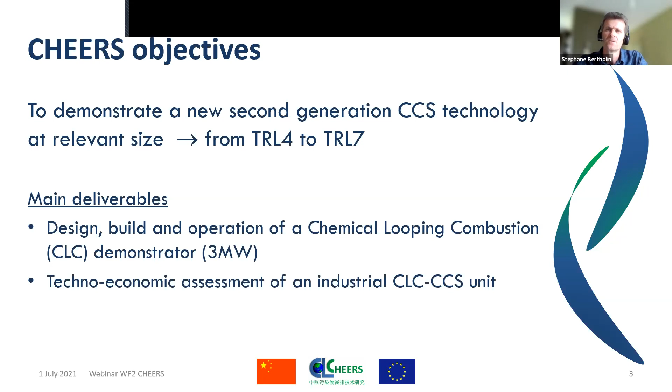So to achieve these goals, the project is organized in several work packages. The first one, work package 1, led by SINTEF, is for the coordination of the project. And then you have work package 2 for design studies, work package 3 about development of the oxygen carrier. In fact, it's the selection of the oxygen carrier for the demonstration unit.

Work package 4 is for the process integration. So basically, it corresponds to the FEED for the demonstration unit. Work package 5 is about the assessment at the industrial scale. And the most important, work package 6, led by Tsinghua, is about the construction and operation of the demonstration unit in China. And finally, work package 7, led by Bellona, is about the communication and dissemination for the project.

So today, we'll just focus on work package 2, the design studies. So just to conclude this brief introduction and provide some information before the presentation of my colleague, I would like to highlight what was the biggest challenge for this work package. So as I said, CHEERS is a Chinese European project with a common objective, which is a demonstration of the CLC technology, but considering different purposes.

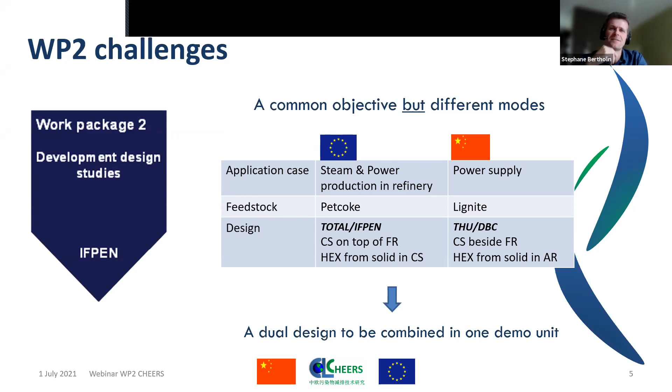And at the end, I will come back to present a brief overview of the main results of the pre-FEED study, which was the final deliverable of this work package, and the main input for work package 4, which was the FEED of the demonstration unit. And at the end, we should have time to provide some conclusions, the current status of the project, and answer your questions. So now I will give the floor to my colleague Sina, who will present the European design.

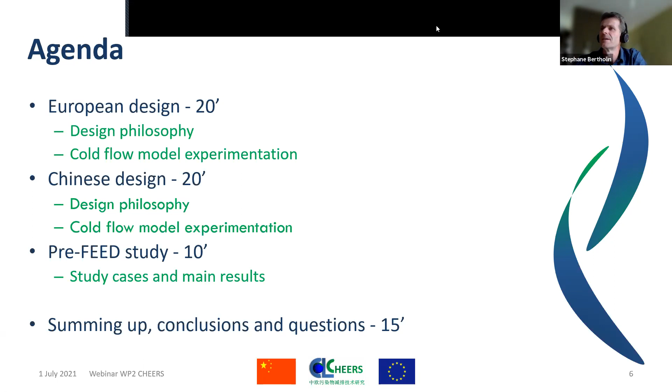Thank you very much. So just, okay. Oops. Should be fine right now, right? Yes, it's fine. Okay.

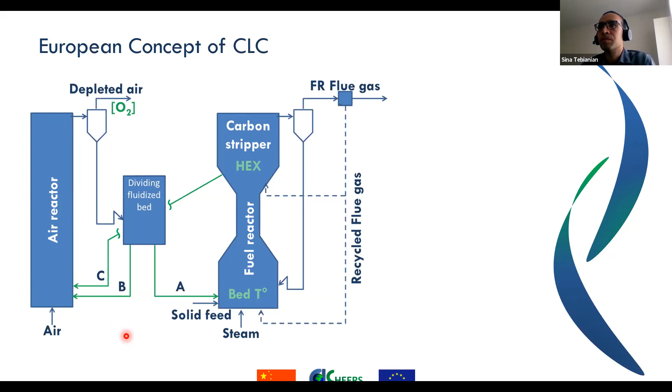The solid circulation actually is a very crucial parameter in the unit, because it's not only the solid circulation, but also it can define the operating conditions of the unit. For example, if we talk about the L valve A, of course, it controls the oxygen carrier flow rate to the fuel reactor, but the solid flux is also the amount of heat that we are bringing from the air reactor to the fuel reactor for the combustion reaction. Therefore, we can use it also for controlling the fuel reactor bed temperature for the desired value that we have.

The other one, the L valve B, is used for oxygen carrier recycling around the air reactor, and that's actually used if we are not satisfied with the degree of oxidation of the oxygen carrier in one pass, and we want to control the concentration of the oxygen in the depleted air. Therefore, we can actually recycle a part of the oxygen carrier back to the air reactor in order to achieve the concentration of oxygen that we need in the depleted air.

The last L valve, which is connected here with the letter C, is of course for controlling the solid flux back from the carbon stripper to the air reactor, but also can be used in order to control the level of fluidized bed in the carbon stripper. As Stephane was saying, our carbon stripper has an integrated heat exchanger, and the level of the fluidized bed in the carbon stripper actually can define the amount of heat that we are going to extract. And therefore, with L valve C, we can actually do this control.

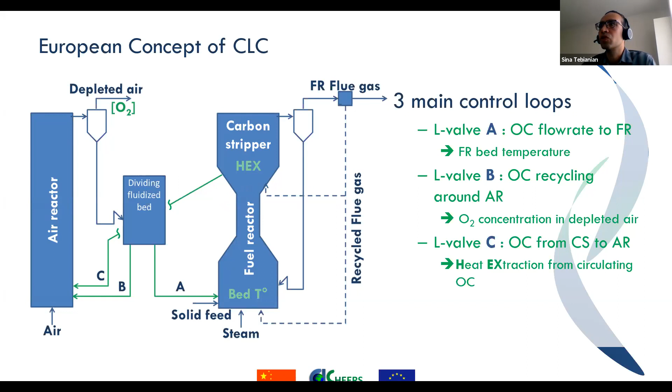Between 2017 and 2022, which is actually the project CHEERS, it was mainly on the industrial demonstration of the technology. Therefore we are designing and now going to the construction of a 3 megawatt industrial demo unit that can be operated in autothermal operation, but also integrates some other important parts of a CLC, which are integrated heat exchange and flue gas treatment, for example, based on DeSOx and DeNOx.

Between 2022 and 2027, the commercialization of the technology once we demonstrated it on the industrial demo, and that one is the demonstration of the process in a 50 megawatt scale unit, and also integration of the carbon capture and storage chain in a refinery or petrochemical industry. So that's the European roadmap for CLC development.

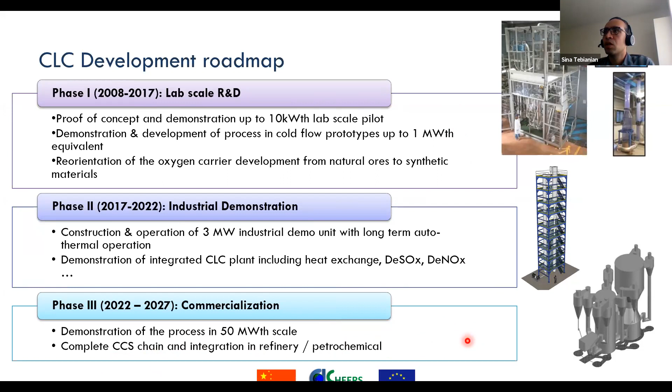In more detail, our activity was to obtain a robust design of different sections through research and development. So the main sections that I mentioned before are shown in this scheme here. The air reactor, that in our technology is mainly a riser. For that one, we studied its hydrodynamics through this cold flow mock-up with an 18-meter riser. We also studied the solid circulation that is controlled with L valves, and those were studied at different scale prototypes up to a scale of 1 megawatt.

We studied also the carbon stripper with a compact and fast separator at two different scales. The concept was validated at a 10 kilowatt cold prototype, but then was studied also in a 1 megawatt cold prototype in order to obtain a robust design.

The fuel reactor, as you can see here, has two different sections. The bottom section is mainly for giving the residence time necessary for the gasification of the solid fuel. And once we have the gasification, we have this other section, which is a dilute transport section. So it's mainly in pneumatic transport, for combustion termination of the gases produced in the gasification. And that one we also studied in different scale cold flow mock-ups.

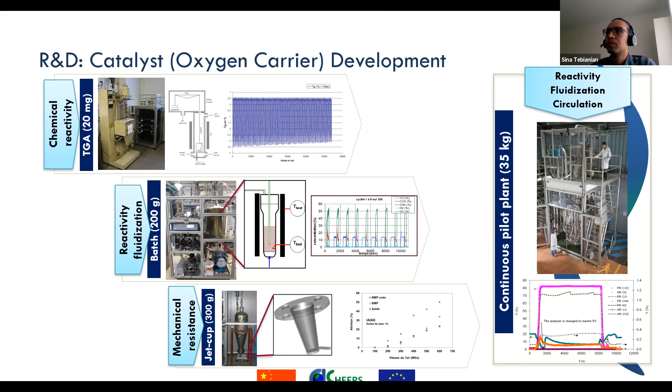So as Stefan was saying, as part of the CHEERS project, we have also produced a prototype of our design. The main reason behind the construction of this cold flow model was that the reliable design and operation of chemical looping combustion depends on some parameters such as stable and controlled solid circulation, hydrodynamic stability in the fuel reactor and the air reactor, and the adaptability of the heat exchange to the thermal power. So if we want to increase the thermal power, we have to increase also the capacity of the heat exchanger, and also the efficiency of oxygen carrier and solid fuel in the carbon stripper.

We have decided to build an equivalent 1.5 megawatt cold flow model that this time actually integrates all the sections of our design together in one unique cold flow model. What we have done until now was to study and characterize individually each section of the design. This time we are integrating all together in order also to show that the design is stable and robust, and the operation is stable and can be operated for long hours.

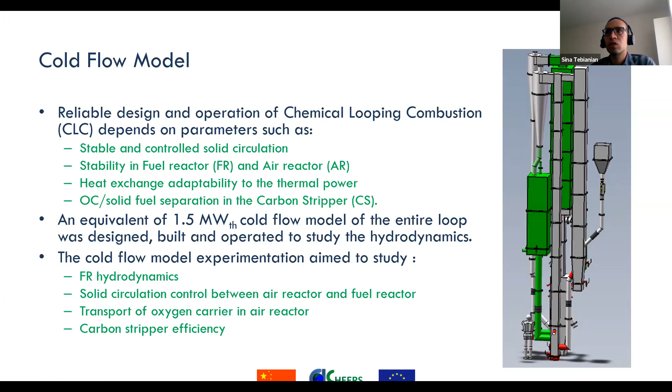And we did some experimentation in order to characterize the fuel reactor hydrodynamics, to show the solid circulation control between the air reactor and the fuel reactor in continuous operation, to study also the transport of oxygen carrier in the air reactor, and also to show the carbon stripper efficiency. And I will show some of the results in this presentation.

Okay, so here I'm just showing the time frame that involved the construction. This was a collaboration, of course, between Tsinghua, IFPEN, Total Energies, and Dongfang Boiler. So we were all part of this design. We had the meeting in Lyon in 2018, and then we did some detailed design. We did the construction, the commissioning, different rounds of experiments in order to optimize the system of measurements and also the design. And finally, at the end of 2019, we did a successful round of experiments for obtaining different experimental data. You can see a picture of the unit here.

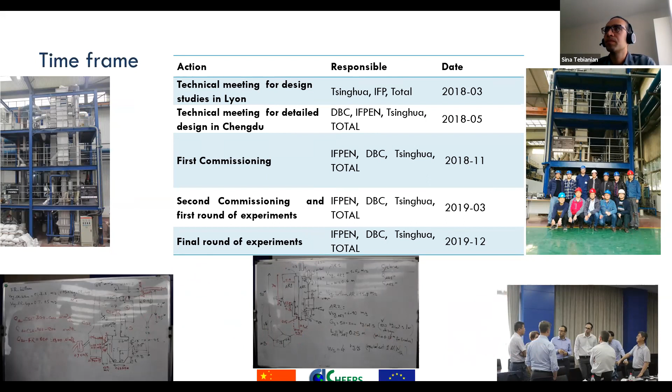These are just some of the notes that we were taking during the meetings with our other partners. And here is just a picture of the group that we were working with during the commissioning.

Okay, so the geometry, as I said, is really very close to the demo unit that we are doing in terms of the characteristics. We have an air reactor, a 10 meters high riser with a square section of 0.25. Then the solid flows to the dividing fluidized bed, different L valves, one for recycling back to the air reactor, and the other one to be sent to the fuel reactor. Different sizes were also used in order to see the effect of the size of the L valve.

The FR dense section that is used mainly for the gasification was 2.5 meters high, with a cross section of 0.6 by 0.6. Then this one was connected through a riser to the carbon stripper that was 3.9 meters high, and we equipped the whole unit with pressure taps and also the possibility to do some dipleg filling for characterizing the hydrodynamics and the solid circulation.

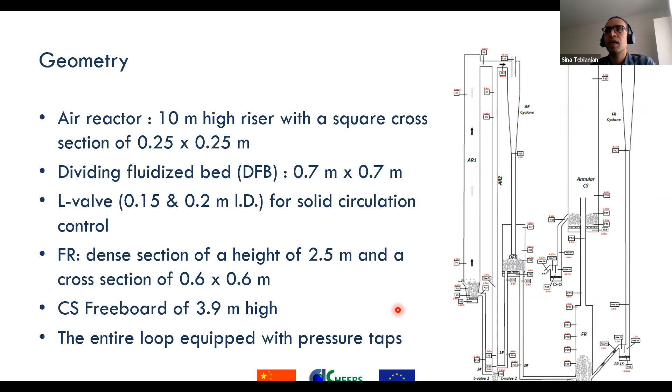So in this slide, I'm going to show you the visual behavior of the cold flow model, and you can also find this video on our CHEERS YouTube channel.

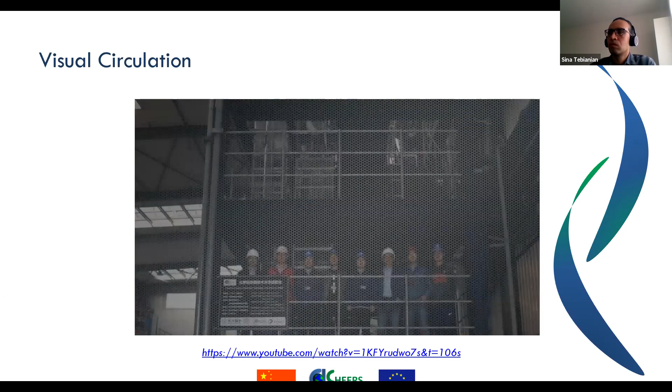Okay, so from the qualitative part, now we jump to the quantitative results. Some of the results I will show here. This is the air reactor. As I said, the solid circulation was controlled by L valves and measured by DFB cyclone dipleg solid accumulation.

In this graph here on the bottom, you can see the riser solid mass flux with the different L valve variations. We can actually increase the solid circulation with the L valve variation, but it also depends on the superficial gas velocity in the riser because of the pressure drop in the riser.

We also studied the maximum capacity of the riser, of the gas at a very low superficial gas velocity, and you can see that the pressure drop actually at a certain solid flux increased significantly, which corresponds to the maximum capacity of transport of the gas in that condition, which is the choking condition that should be avoided for stable operation.

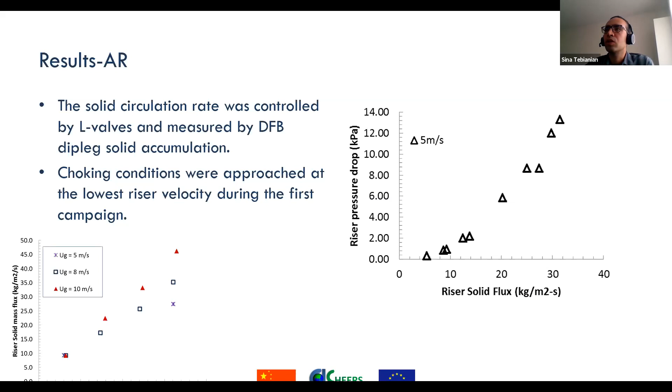We also studied the average pressure fluctuations at different superficial gas velocities, and this value was very important also for the design of the demo unit in terms of vibration and mechanical stress on the structure, and that was actually used for this design of the demo unit.

We also studied the carbon stripper. The carbon stripper efficiency - we need to collect all the large particles which represent the oxygen carrier, and let the finer particles, which are mostly the solid fuel, leave the carbon stripper.

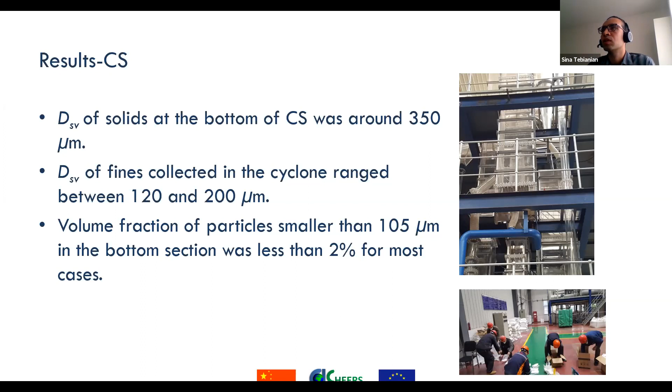We saw that the diameter of solids at the bottom of the carbon stripper was independent of the operating conditions and around 350 micron. The fines collected on top of the carbon stripper were between 120 and 200 micron, and the most important thing is that the particles smaller than 105 micron in the bottom section were less than 2%, which means the carbon stripper is actually 98% efficient, and we do not have a lot of unburnt fuel leaving the fuel reactor and going to the air reactor section, decreasing the CO2 capture efficiency.

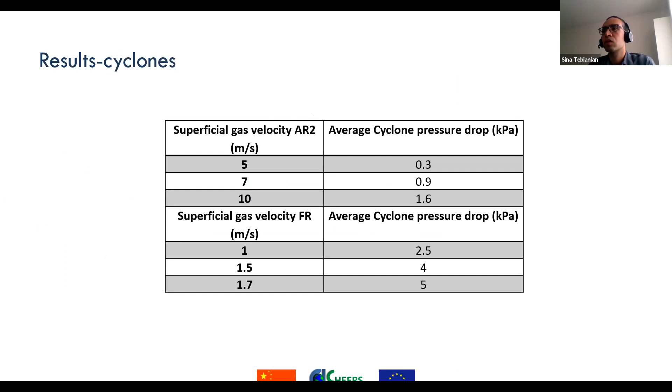Here I just wanted to say that we studied the cyclone at different operating conditions with different pressure drops for the air reactor and the fuel reactor, and the results are going to be published in the future.

So as conclusion, the several years of R&D activity resulted in a successful design of the CLC concept based on IFPEN and Total Energies technology. The cold flow model of the entire unit demonstrated the stability of the design in a wide range of operating conditions.

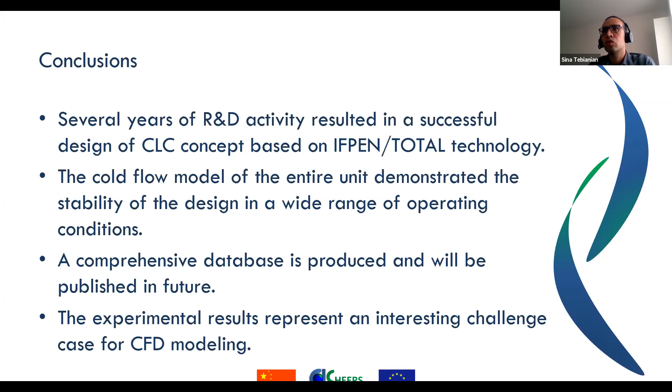We built a comprehensive database that will be published in the future, and also the experimental results represent an interesting challenge for CFD modeling that we have been involved in, in order to test the reliability of CFD.

So thank you very much, and here is my contact if you have any other questions. Thank you for your attention.

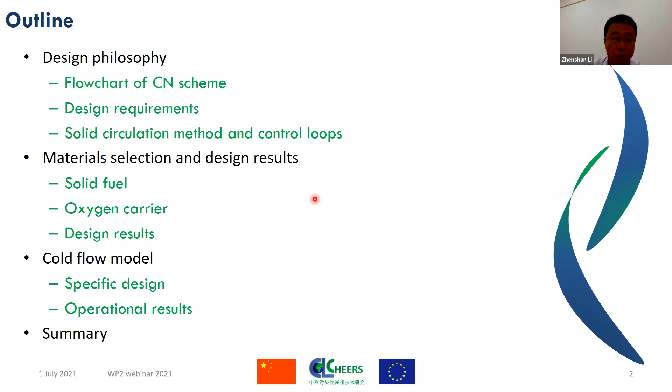First, I will introduce a very short overview of our research activity of CLC in Tsinghua. Actually, we studied the research of chemical looping from 2002. We had built a fluidized bed TGA for kinetic study, including both reduction and oxidation kinetics of the oxygen carrier and char gasification.

This method can reduce the mass transfer and heat transfer resistance, and can get more accurate kinetics. And then we built a 1 kilowatt thermal input CLC unit, and then a 30 kilowatt thermal input CLC unit.

Recently, we have built a 100 kilowatt thermal input CLC unit. The total height is 20 meters high. So in this height, I think it will be suitable to study the unburned gas conversion.

Inside the CHEERS project, we built a 1.5 megawatt cold flow model. I will introduce the result in the next section. And now we are focused on the 3 megawatt demonstration unit in the CHEERS project.

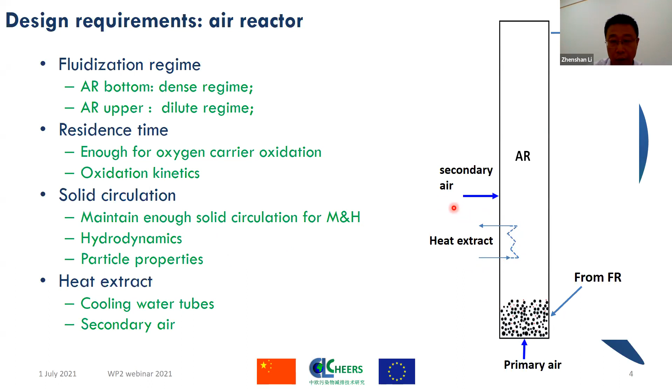We also consider how to extract the heat from the air reactor, because a lot of heat will be released from oxygen carrier oxidation in the air reactor. In order to control the circulation rate, we divide it into a primary and secondary air for the air reactor.

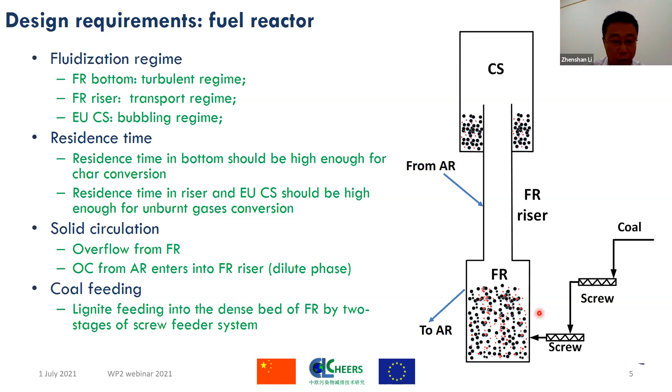If the bed level is not enough for the fuel reactor, we must add enough solid into the fuel reactor bottom in order to achieve the overflow principle. So this is very important for the Chinese design — the fuel reactor should be filled with enough oxygen carrier.

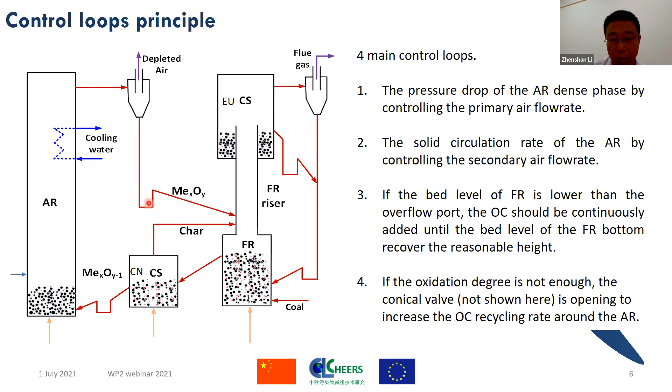If the oxidation degree of the oxygen carrier is not enough, some oxygen carrier will be diverted from this loop seal and then returned back to the air reactor. I didn't show it here, but we actually have some method to achieve this purpose.

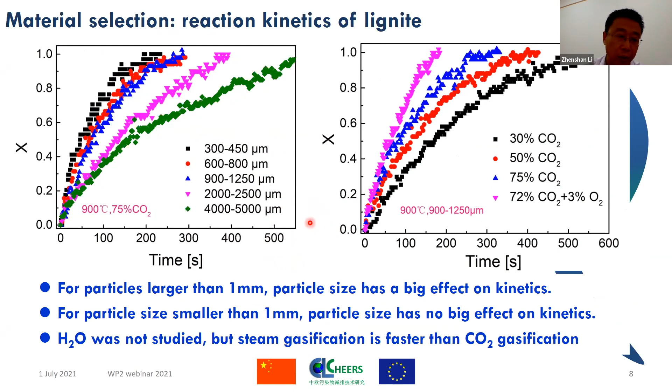As shown in these figures, we did the gasification test of lignite for different particle sizes. We found that if the particle size is less than 1 millimeter, the gasification kinetics is okay for the fuel reactor gasification. For the oxygen carrier, there are 2 titanium ilmenites.

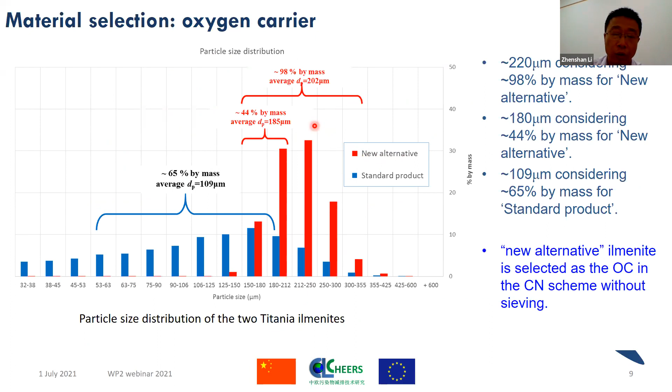Finally, we selected the new alternative material for testing in the demonstration unit. We also tested the kinetics of this ilmenite oxygen carrier, as shown in this figure.

For oxidation and reduction, we can find that for the oxidation of ilmenite, the initial stage is very fast. The oxidation in the first stage can be finished within 5 seconds. This means if we can make use of this stage, the residence time of oxygen carrier inside the air reactor should be very short.

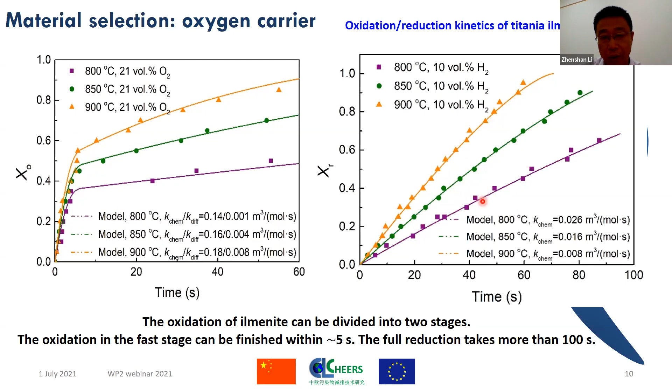For reduction, ilmenite will require at least 100 seconds. So based on this information, we did some calculation and design of the whole process.

I will not introduce this in detail, but for example, we calculated 11 cases from 2.4 megawatt to 4 megawatt for different thermal inputs and different operational parameters. For the hydrodynamic features, we can calculate how much solid particle exists along the reactor height. You can see the solid fraction in the upper section is actually higher than that of a traditional CFB boiler.

The total pressure drop is about 21 kilopascals. This bed inventory is enough for the oxygen carrier oxidation. This figure shows the solid fraction distribution along the fuel reactor. You can see here there are a lot of solid particles at the bottom of the fuel reactor, so as to ensure the overflow.

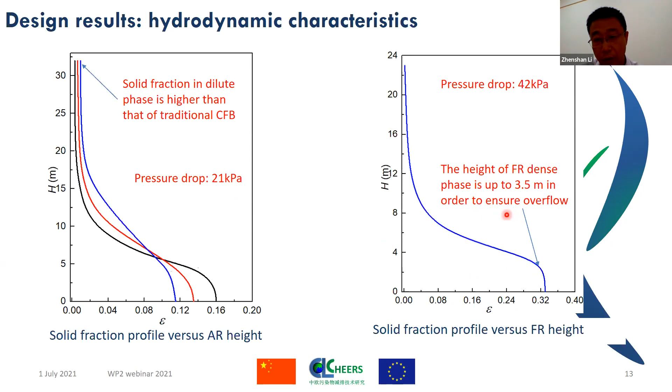For the oxidation time of oxygen carrier, we found that from 0 to 60% oxidation is very fast. So we think it may not be necessary for oxygen carrier to get 100% conversion, because for chemical looping we just need delta X, meaning delta conversion. So we can select the oxygen carrier reaction at the very fast reaction stage, in which case the residence time for the reactor can be short.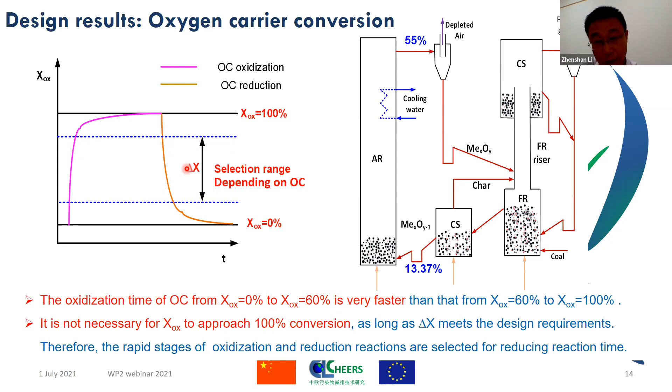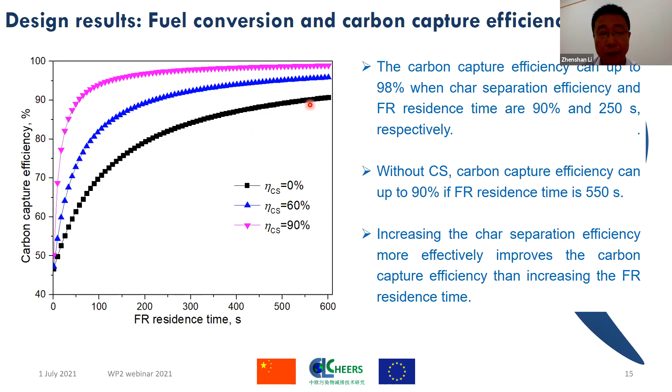We also calculated how the carbon capture efficiency changes with residence time and carbon stripper efficiency. We found for lignite, even without a carbon stripper, we can achieve 90% carbon capture efficiency, because lignite is a very reactive solid fuel and has very fast gasification kinetics.

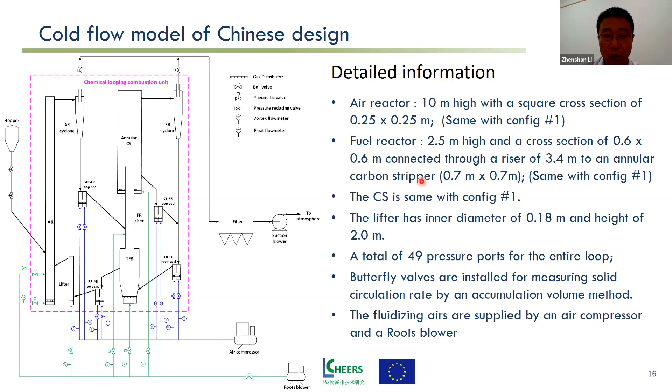As shown in China, we also did the cold flow model test for our design. These values are totally the same as what's shown in Sina's presentation. I'll just show some results. In our test, we used 3 different particle sizes of sand, and also measured the solid circulation rate, solid fraction, and residence time.

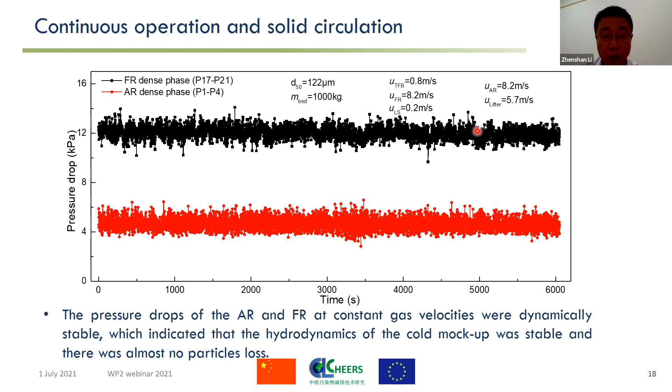We then studied the particle distribution at different equipment. We found most particles are located at the fuel reactor bottom, the turbulent bed, as shown here, because the fuel reactor bottom is very large, so it requires a lot of solid particles.

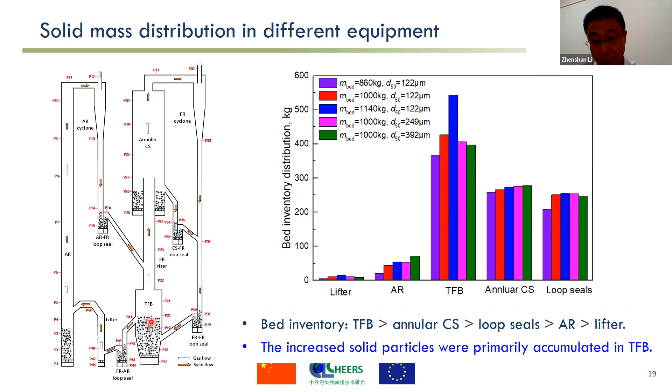I also studied the transition gas velocity at different operational parameters, because this is a very important parameter for turbulent flow design. We found with 3 different particle sizes, this transition from bubbling to turbulent fluidization is different. So based on this experiment, we got these numbers for design.

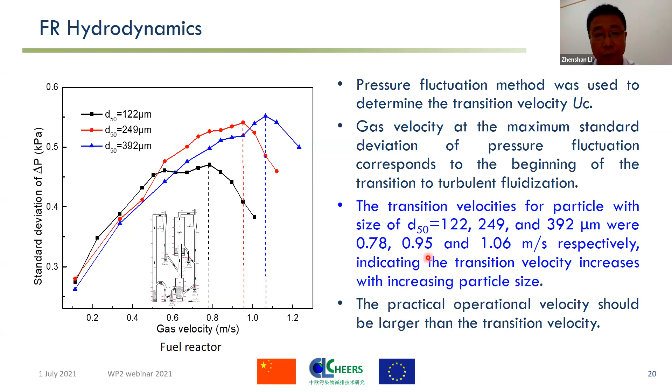The test result indicates the overflow model can predict the solid circulation rate accurately, with error within 25%, which is enough for engineering design.

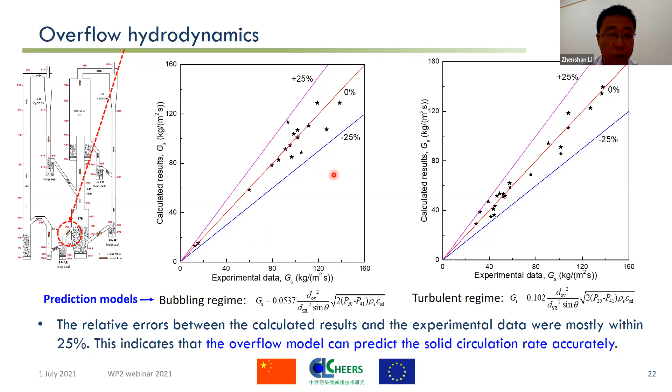Sorry, there's heavy rain outside, so I closed my window.

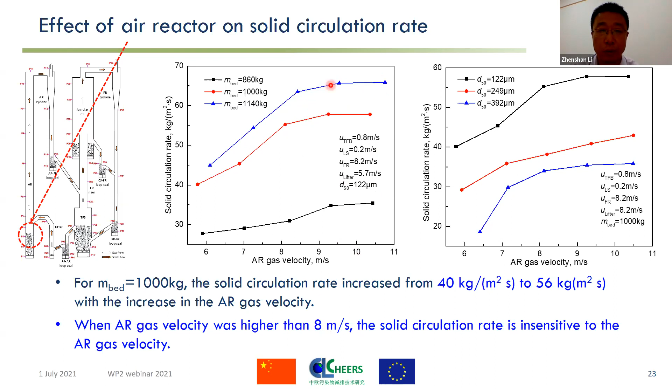So you can see the solid circulation rate increases very fast with gas velocity, but we found when the gas velocity is higher than 8 meters per second, the solid circulation rate stabilizes and doesn't change much.

We also found the pressure drop of the air reactor in the dilute phase depends on the circulation rate, as shown in this graph. Based on this finding, for the demonstration unit we can measure the circulation rate based on this pressure drop if we do some calibration at lower temperature. So based on the pressure drop along different heights of the air reactor, we can measure the circulation rate, because for the fluidized bed at high temperature, it's not easy to measure circulation rate directly.

But circulation rate is very important for the chemical looping combustion of solid fuel.

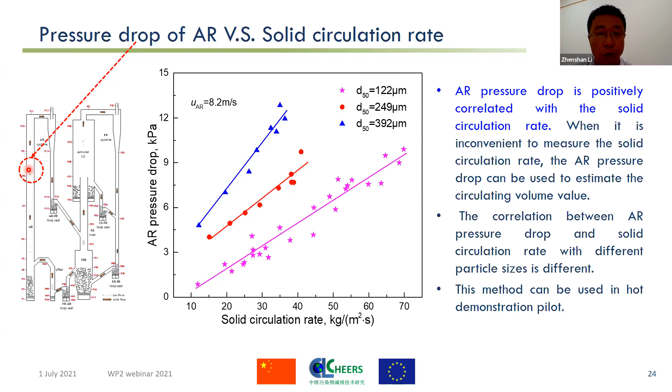We can also look at the residence time in the fuel reactor, because this residence time is also important for char conversion. In our design, the residence time ranges between 200 and 300 seconds, and we think this residence time is enough for lignite char conversion. So even at not very high temperature, we can achieve more than 80% carbon capture efficiency.

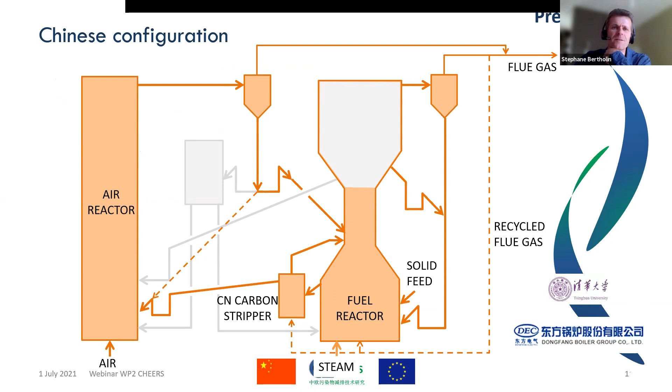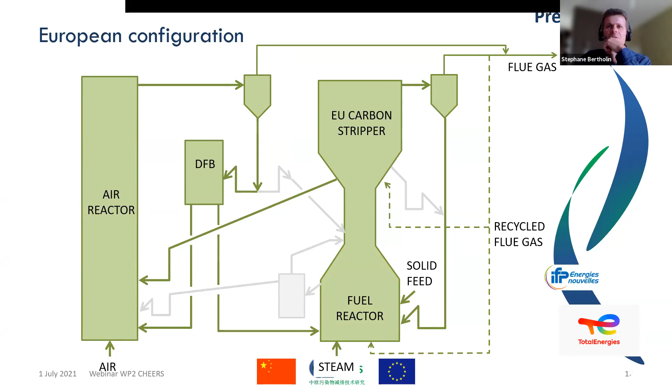The second one was to be able to assess a wide range of operating conditions, which means, for example, to operate with a thermal input which can vary from 50 to 100%, which means in our case from 2 to 4 megawatts, considering that 3 megawatts is the nominal case.

Regarding the oxygen carrier, we also intend to operate with different conditions in terms of oxygen transport capacity, density, and oxidation states of the oxygen carrier. Regarding the fuel, we have considered natural gas and biomass for the startup, and petcoke and lignite for the operation.

So finally, we have produced 23 design cases, which have been fully calculated to reach the operational limits of the process for the FEED. So it was really a huge work to produce all of these heat and material balances for many cases.

And finally, the last requirement was to provide a design which is representative of a large-scale unit, which means to be able to reach a high carbon capture efficiency, to have an autothermal operation considering significant heat losses. So in our case, we have considered 20% heat losses, and also to put in the unit refractory that can be used at industrial scale. For that, a study driven by TotalEnergies was conducted with a French company specialized in refractory materials.

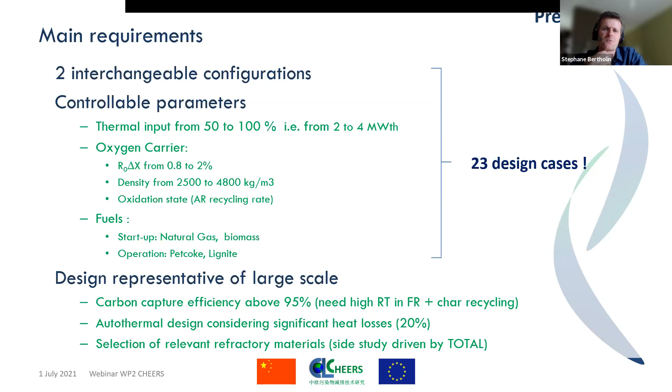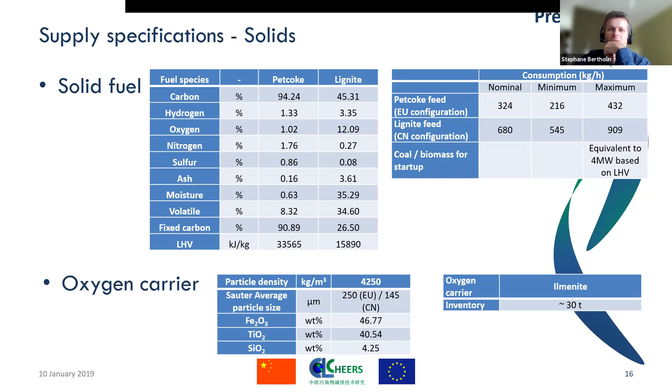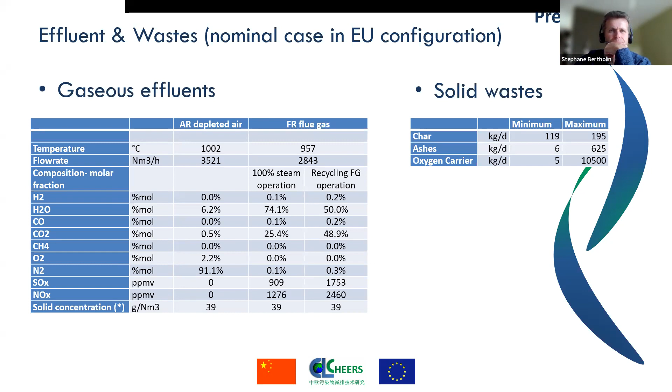Then we also provide some standards for the engineering company, a description of the control loops for the operation of the unit, and electricity consumption. We also performed a first HAZOP to prepare the FEED. We have provided a preliminary plot plan.

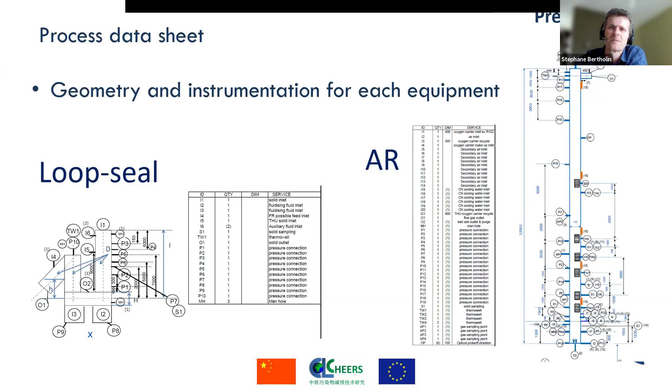Oh, sorry, I forgot to mention this part. This is regarding the equipment list and specification. So I forgot to mention that we have provided a process data sheet for all of the main equipment. So here you have, as an example, the process data sheet for the air reactor and one loop seal. On this document, we provided the internal dimensions of the equipment and all of the sensors and sampling which are needed for the experimentation.

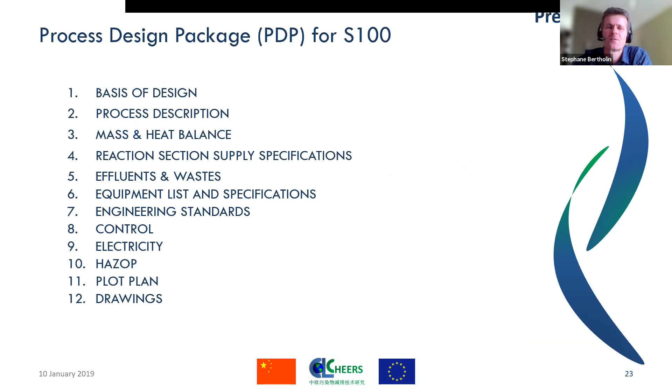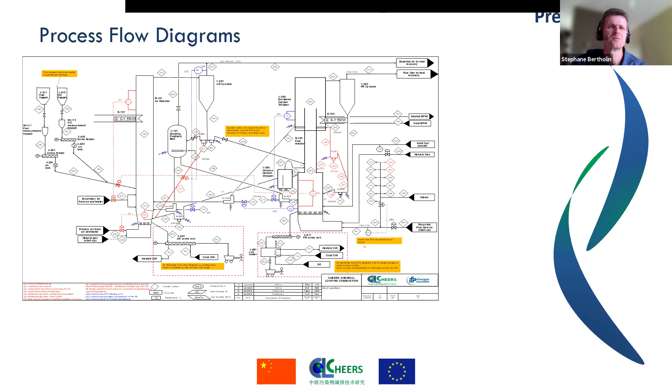And finally, we also provided some drawings, especially a process flow diagram for the unit. So for example, here you have the PFD for the main section of the unit, section S100, in which you can see the main equipment, the air reactor, fuel reactor, the carbon stripper for the European configuration and Chinese configuration. We also provided here the main control loops for the control of the process, and the solid and oxygen carrier fuel inlet and solid discharge.

We provide the same kind of documents for the flue gas treatment that you can see here. So here you have the exhaust of the flue gases from the air reactor and the fuel reactor. In CHEERS, for the polishing of the flue gas from the fuel reactor, we just mix flue gases from both reactors in the mixing chambers to proceed to the combustion of the unburned compounds with the depleted air from the air reactor. So it is in this part.

And then we have a backpass which includes DeNOx, DeSOx, and the cooling of the flue gases. And at the end, a dedusting section before sending the flue gases to the chimney. And this part is for the recycle of the flue gases from the fuel reactor, with a small backpass to cool down the flue gases, a dedusting, and here a compressor to be able to recycle the flue gases to the fuel reactor, carbon stripper, and other equipment.

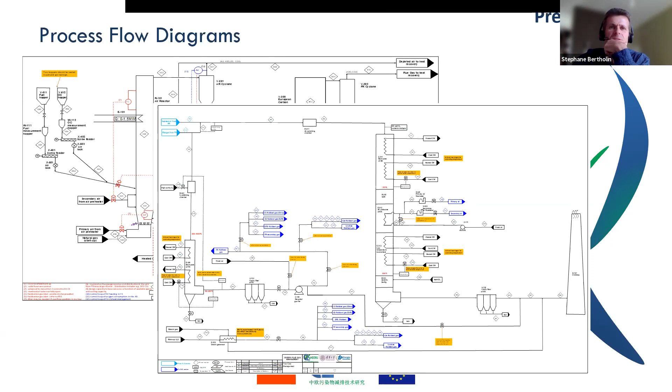So that's what I wanted to show for the pre-FEED study. So now to conclude the presentation, I will just provide a short sum-up of what we have talked about and the current status of the CHEERS project. So just to sum up the main achievements of work package 2: we have provided a 3 megawatt CLC demo unit design at pre-FEED stage. It was a challenging multimodal design because it included 2 different configurations.

We also designed, built, and operate a cold flow model at the size of 1.5 megawatts in both configurations. For doing that, we have developed a set of design tools which are now available for designing a CLC unit at industrial scale. And last but not least, we can say that this work package 2 was a unique and successful collaboration between China and Europe for CLC CCS, as we have succeeded in developing this process.

So what is the current status of CHEERS? Actually, this pre-FEED study was delivered end of 2019, so with 1 year delay. This delay was mainly due to the complexity of the design and also to the design, construction and operation of the cold flow model, which was not expected at the beginning of the CHEERS project. Then the next step is the FEED study in work package 4, which is led by TotalEnergies. This FEED study has been conducted from mid-2020 to May this year.

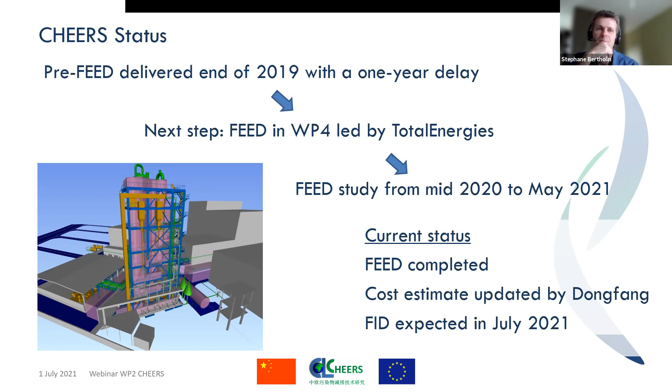So next, we are mid-2021 here. The next phase will be the EPC phase. It will be driven by Dongfang and led by Tsinghua University. This EPC phase will be about one year to provide the demonstration unit. Then we will have a short time for the startup of the unit and 2 different operation phases, one in European configuration and one in Chinese configuration. And then the end of the project is expected by September or October of 2023, with a 1 year delay compared to the initial schedule.

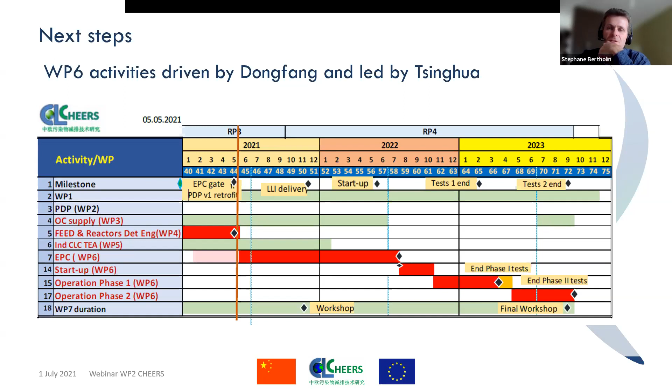Just one short word about progress in the other work packages. Regarding work package 3 about the oxygen carrier selection: after a first screening of material by SINTEF MK at lab scale, 3 candidates have been benchmarked in a pilot unit, both at SINTEF and at IFPEN. The current status is that an ilmenite has been selected for the demonstration unit based on its good performances in terms of reactivity and lifetime.

And regarding work package 5, which is a techno-economic assessment at industrial scale, for this study we have considered two different design cases, one for the refinery case and one for the power application, and two reference cases that will be considered for the benchmark with the CLC technology. The first one is NGCC technology and amine for the CO2 capture. The second one is the CFB technology and CO2 capture with amine. So finally, we will have to provide 6 design cases for this work package, for 3 technologies and 2 design cases.

The current status for this work package: all of these process simulations are now completed. And Total is going to perform a call for tender for the cost estimation of all of these design cases.

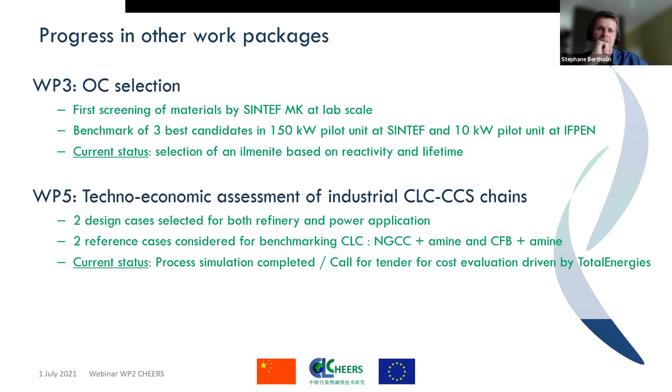So thank you for your attention. There are 5 minutes left to answer your questions, so please feel free to raise your hand. I don't know if there is a question in the chat. Catherine, have you followed the questions? No, there is no question up to now, so don't hesitate, and we'll be happy to answer you. There is one question in the chat. Oh, okay, you have one? I have some problem because I don't see any. So maybe I read it.

Yes. So: any consideration for A, drying of lignite, and B, potential fragile nature of lignite or its attrition and consequent effect on the carbon stripper design? I think it's mainly for Professor Lee. This comes from Sanka, from Australia, I'm not sure.